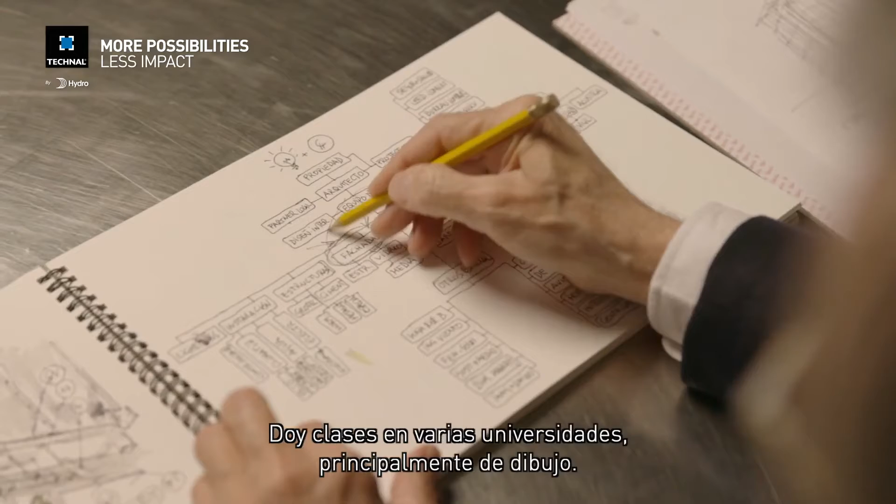We have a small and very dynamic office based in Barcelona, from where we offer facade consultancy to the best architects around the world, especially even Pritzker Prize winners. Usually, architects imagine the result and the engineers create the process. Or explaining it in another way, architects think what and engineers know how. So we, as facade consultants, move in an equidistant position between both, and our projects are developed with a simple philosophy: technique and form are the same.

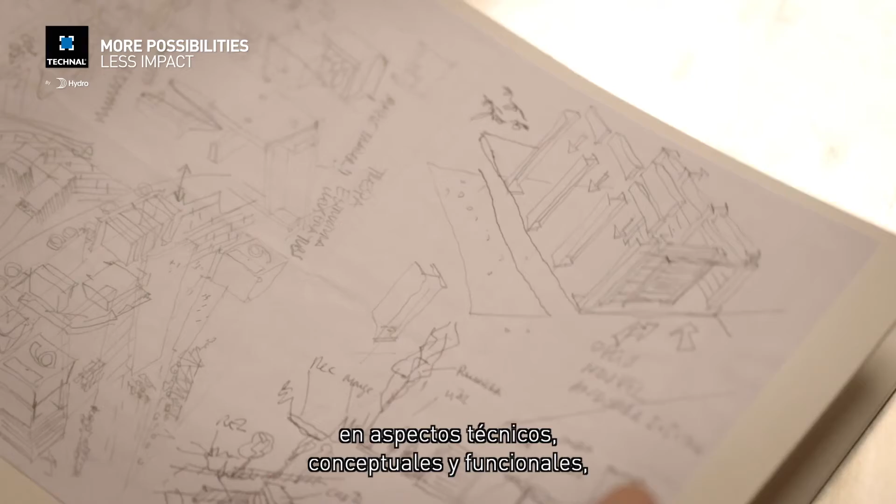Every day, more and more architecture studios focus their work on the level of definition of the facade, the technical aspect and the conceptual and functional development, while the detailing and the specific elements of the facade are delegated to the technicians and specialists from the industry. So the most common way to face the problem of technology is to claim the support of brands that help us to develop the most ambitious projects. Our role as consultant, in addition to the above, is to think and advise from the strategic development.

The present leads us to consider energy as one of the engines of evolution, and this has been the case for decades. However, this contrasts with the need to work with large formats and glazed surfaces that increase the so-called window-wall ratio; the energy performance of the facade is in contradiction with the dimension of the transparent areas of the buildings. On the other hand, this need to increase the sizes requires larger panel dimensions, engineered for bigger and heavier glass panels by means of innovative connections and reinforced glazing support.

Last year, we started with a jumbo glass of 3.2 by 6.2. Actually, we have, with different suppliers, glasses of 18 meters height by 3.4. So, obviously, we can use these sizes of glass.

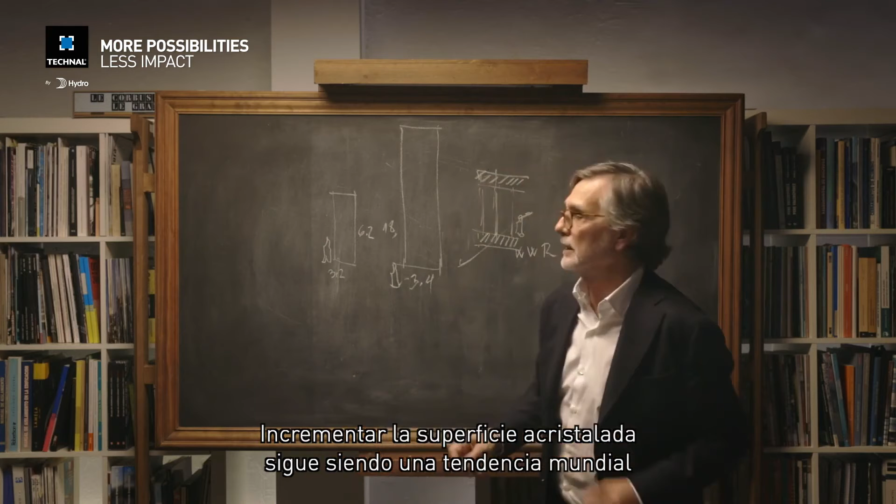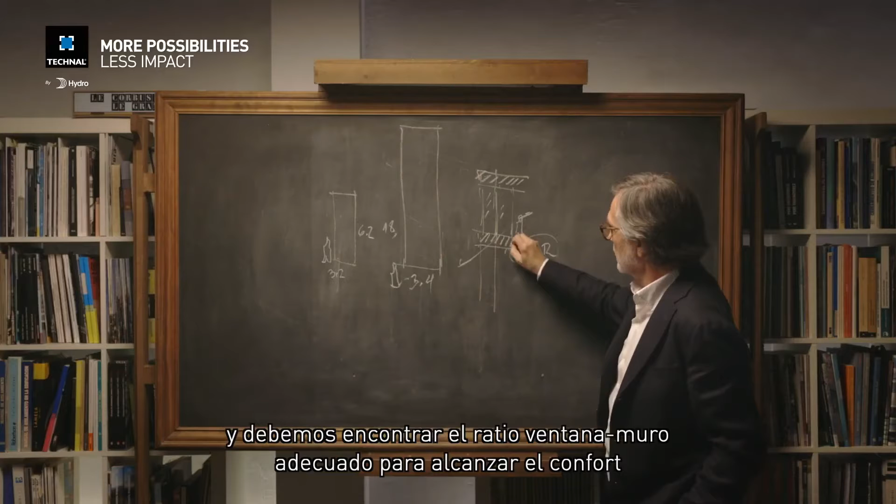The trend of buildings around the world is to increase the glass surface, but balancing it with the window-wall ratio, because we need to balance the comfort of the users, contacting directly across the glass with the landscape, the sea, the rest of the city, with respecting the rules and regulations in terms of energy savings.

The only way that I can explain my experience, my thought, my feeling about the technical decisions, the technical elements, is drawing. My brain is connected with my hand directly. When we are creating, we have to pass from the concept and schematic design to design development and construction documents, trying to be proactive with the architects, usually our clients, in order to achieve the maximal fidelity to the original idea.

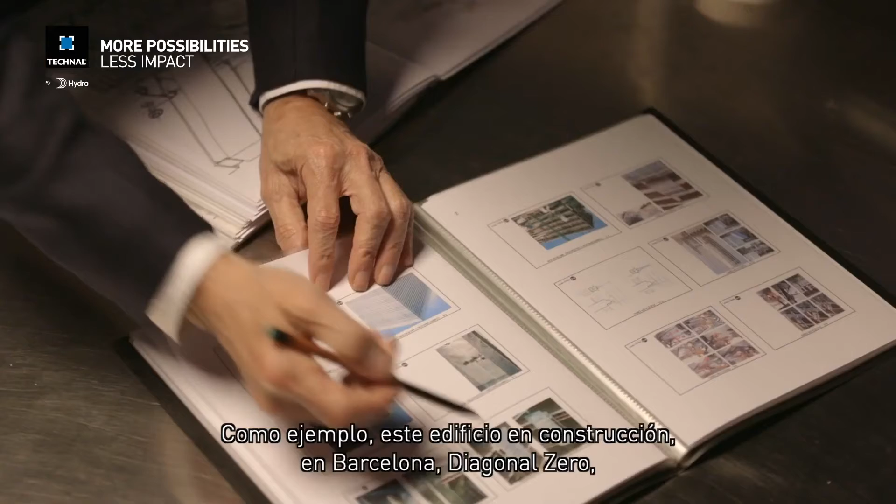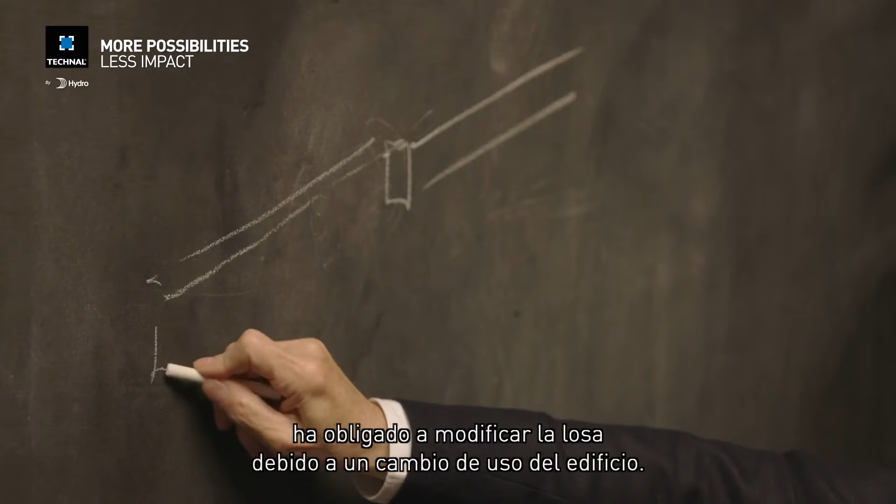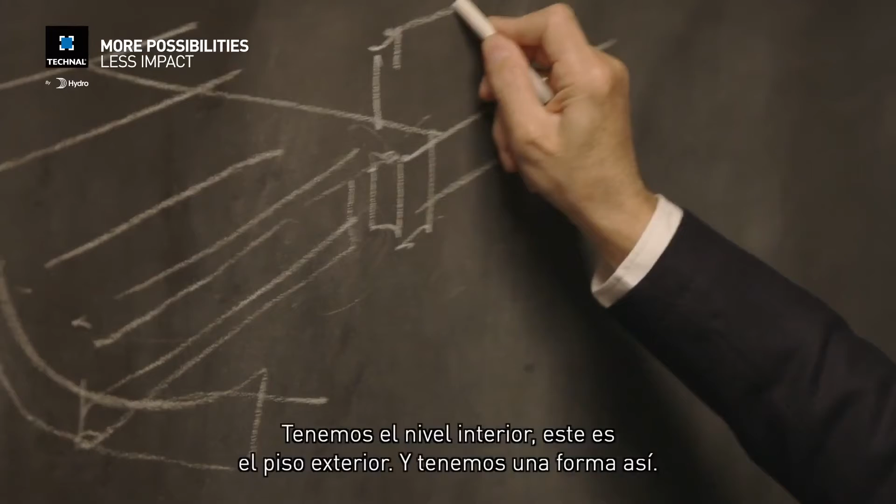For example, a building under construction in Barcelona, named Diagonal Zero. It's a multi-story building, I think 27 levels, with a special balcony. This is the original slab, because it's a huge modification of the building. This is the slab. This is the beam that we have to support. The level of the interior floor. This is the exterior floor, and we have a shape like this. This is a balcony, this is a terrace. The building is something like this.

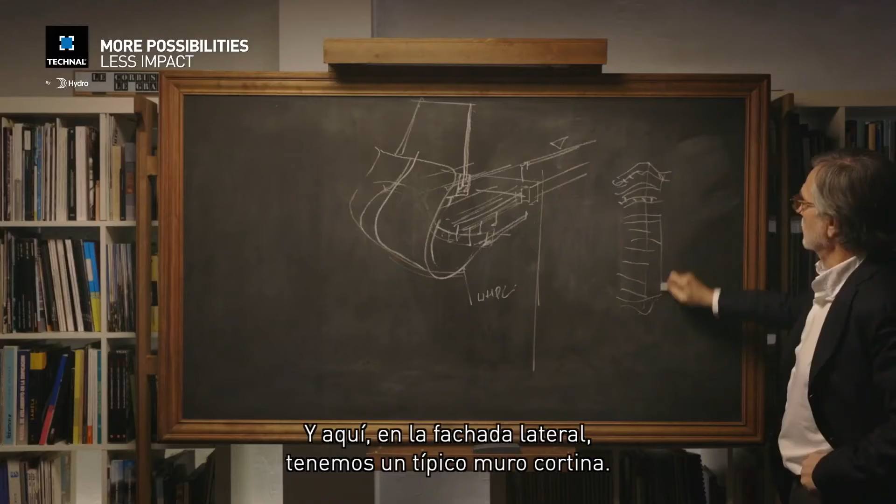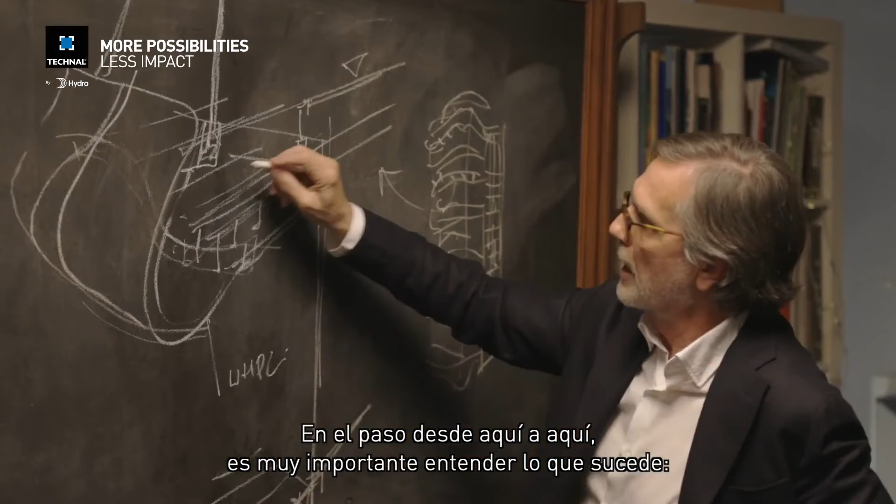It's more or less 110 meters, and all these balconies are here. And here, in the lateral facade, we have a typical curtain wall. It's a typical profile with spandrel and glass and windows, etc. The passage from here to here is very important to understand what happens. What is the slab? What is the structure? What is the weather line?

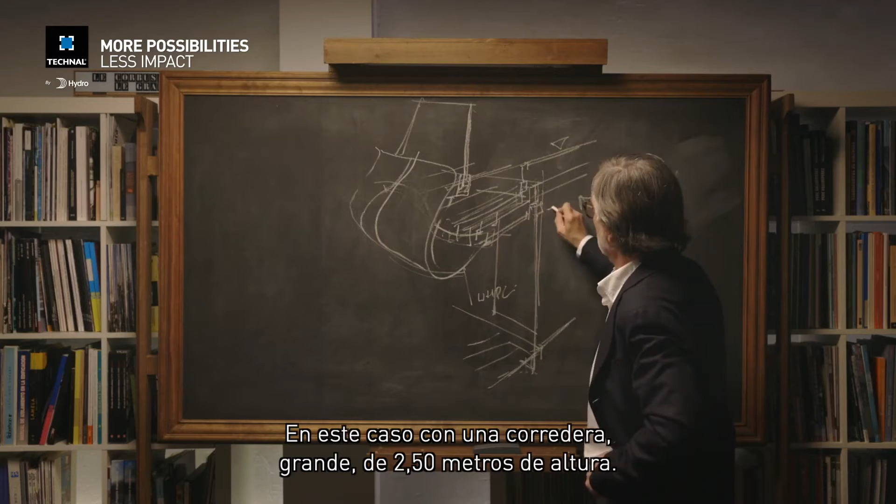In this case, with a sliding corridor, a sliding window, a huge one, maybe 2.50 meters in height, and this is a part. We'd like to show this in color, but I think it's clear in order to understand what happens when we have to develop from the concept to the detail.

The second case that we'd like to share with you is a commercial and residential building in Ibiza, named Isla Blanca. The author is l'agence Moatti-Rivière de Paris. The project is led by Moatti, and the local partner is Xavier Ferrés Diseño. The main concept is a shadow device named voilette in French. It's an element qui vole.

So the building is double like this, maybe 80 meters of length from here to here. To use this kind of material like a hat that produces the shadow under the face of a woman on the beach. And this element is something like this. You have

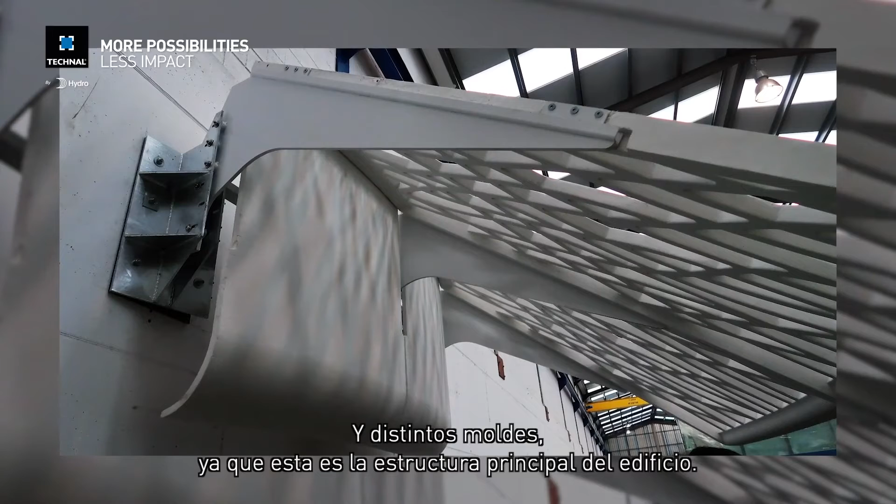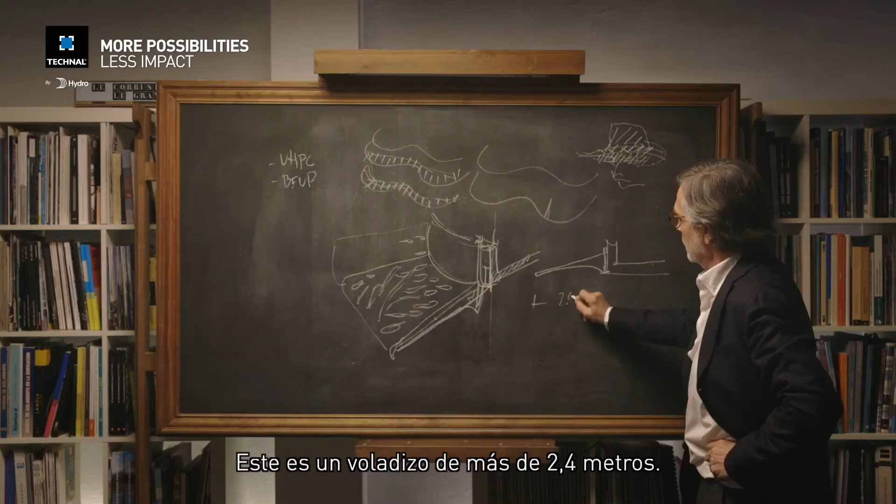there are different molds because this is the main structure of the building, and here is hung a huge element like this that supports these curves. So we have the structural element. This is a cantilever, more than 2.4 meters, and this is the voilette in ultra high performance concrete that allows it to work perfectly like a shadow device.

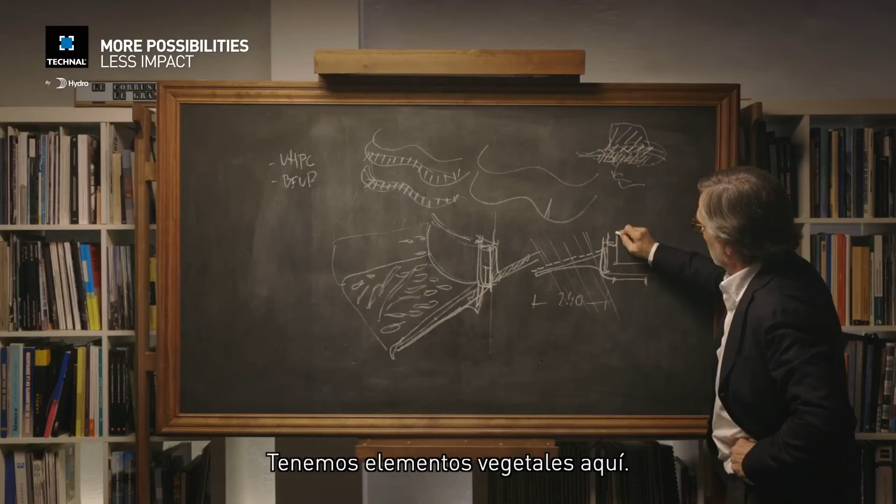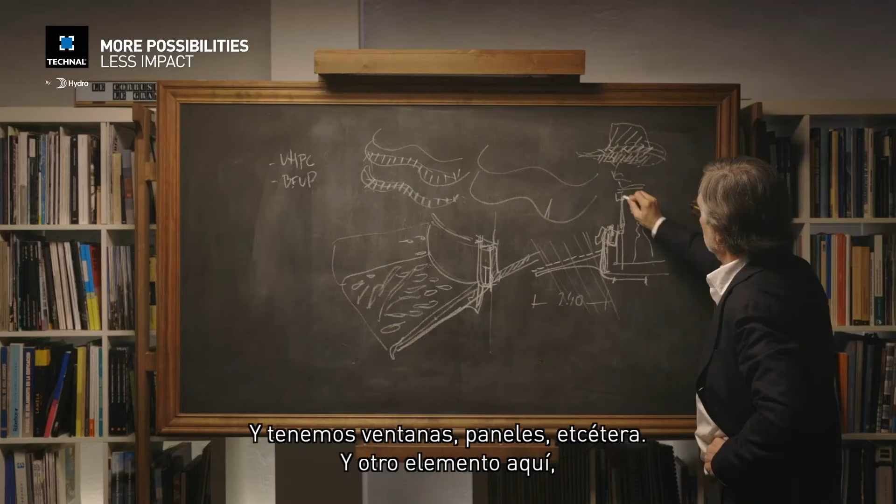So we have the vegetal elements here, and we have the windows, openables, etc. So from here, we have as well another element here that is the characteristic of this building.

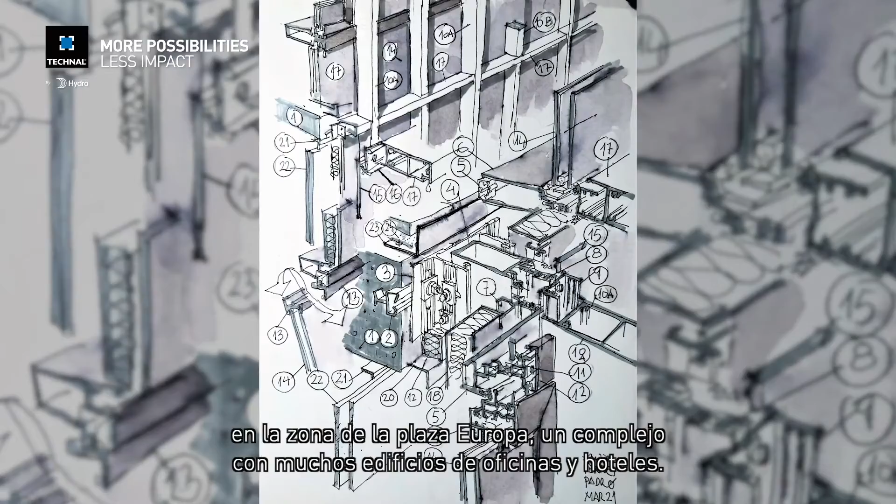The third case study is a multi-story hotel in l'Hospitalet, near Barcelona, in the Plaza Europa zone. It's a huge complex with a lot of buildings, hotels, office buildings, etc. This case is a project of Alonso y Balaguer. It's the most common and typical curtain wall facade. The building is a parallelogram like this, with a typical zone with machines and the HVAC equipment, etc.

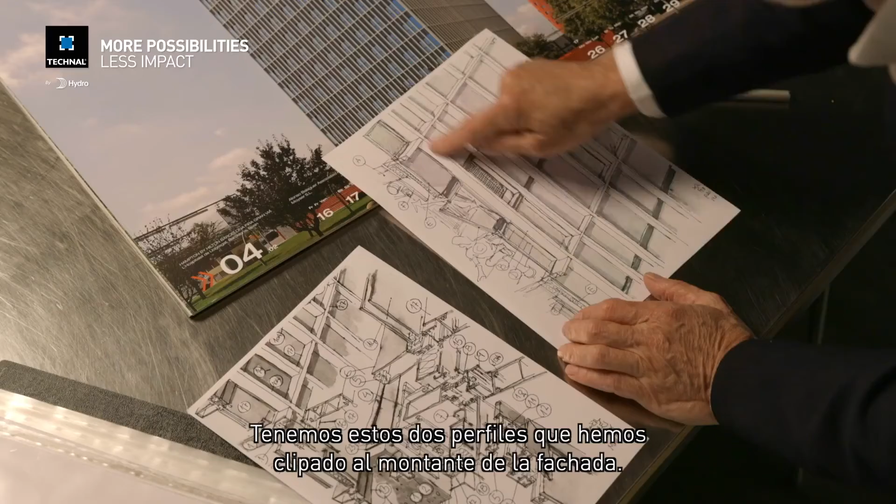And the rest of the facade is a grid, absolutely regular, with the profiles that I will explain, because in terms of technology it's very simple, but the effect is really very interesting. So we have these two profiles, clipped to the main mullion of the facade.

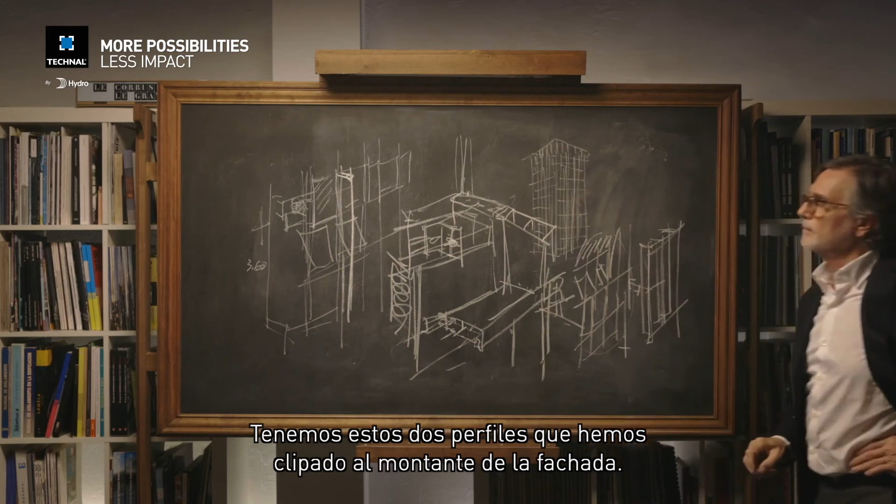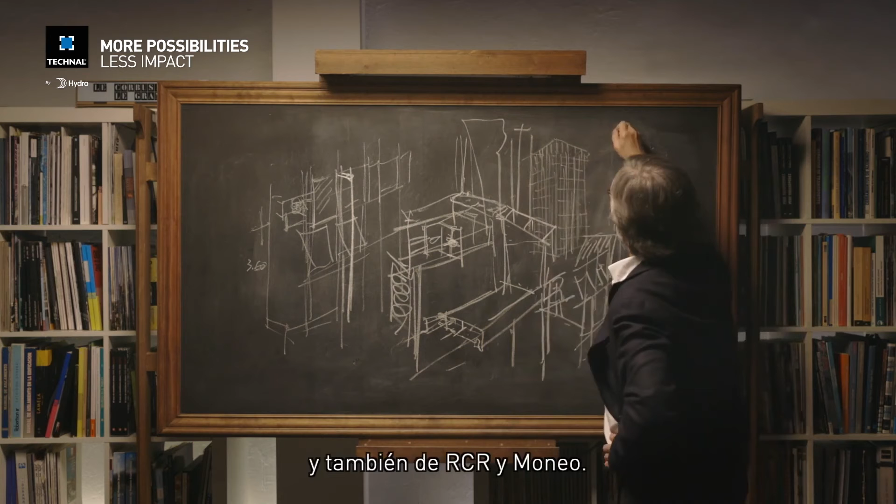And that's it. So here we have the Toyo Ito building, the Nouvel building, RCR here as well, Moneo, and well, it is a very interesting complex that I invite you to visit, because if you are a passionate architect, I think that could be a good option to spend one day in order to know directly all this kind of different architecture.

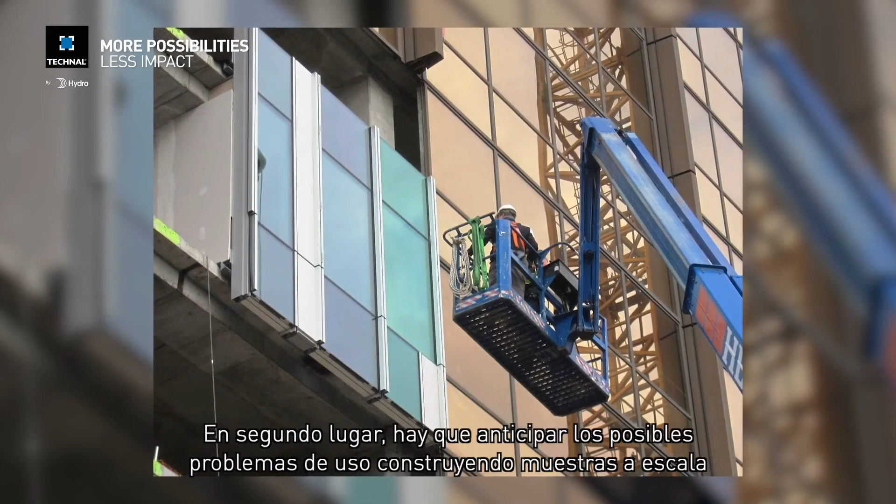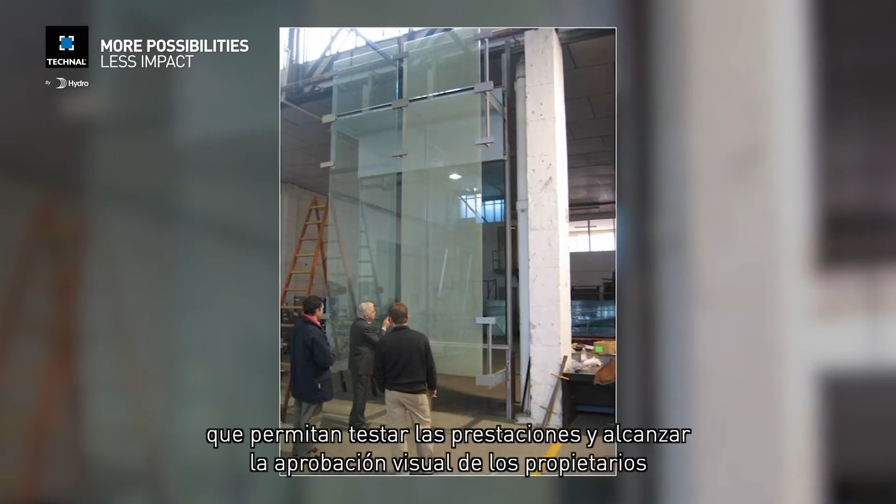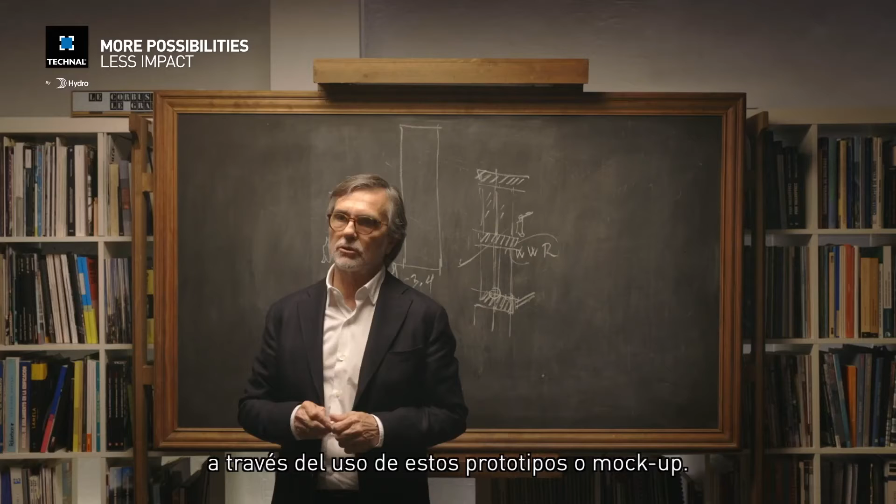As a conclusion, I would like to share with you 5 thoughts as a summary. First of all, evolution that improves considering aspects from different points of view, like industry, architects, investors, owners, and consultants like us. Second, the extreme conditions of use are solved by anticipating the problems and building samples and performance and visual mock-ups that are tested by the owners to approve the final solution, in order to check the transparency, the vibration, all the aspects that we have to control by using prototypes and mock-ups in real size.

Third, we have to look for collaboration with international brands that belong to a big and well-known group. It is the best option to guarantee a long experience of success. The fourth topic that I think is important to sum up this small explanation is to involve the clients and users in the project. Planning, commissioning, exploitation, maintenance, life and recycling of the building as a way of working, because we have to change our attitude about the design and use of buildings.

And finally, we have to work from a global perspective, making it essential to combine the most diverse languages, cultures, rules and regulations, economic and social criteria with the most attractive architectural proposals. And for us, it's a privilege to be able to create a space for a better future.